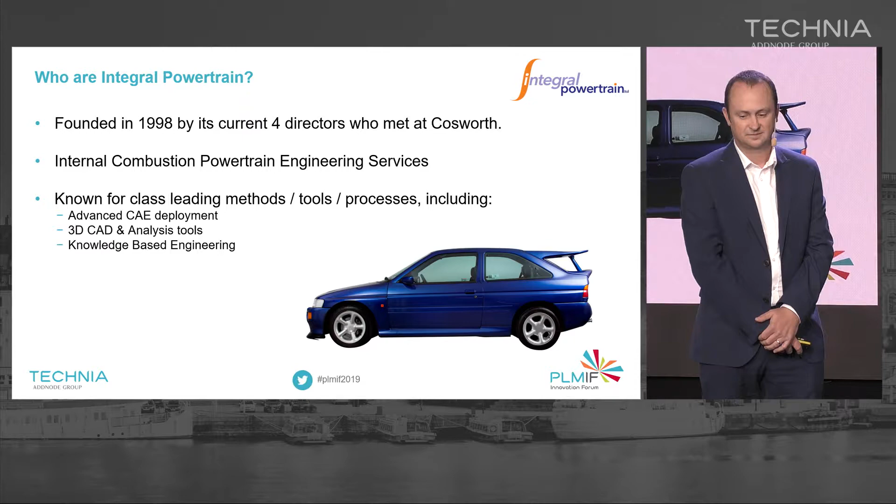So I'll hand over to Nigel to give you a bit of background. Okay, thank you. So the company was founded in 1998 by 4 directors who all met at Cosworth. Initially, the company was very much based around internal combustion powertrain engineering services. But even in the early days, it became quickly known for class-leading methods, tools, and processes around advanced computer-aided engineering, 3D CAD analysis, and so on.

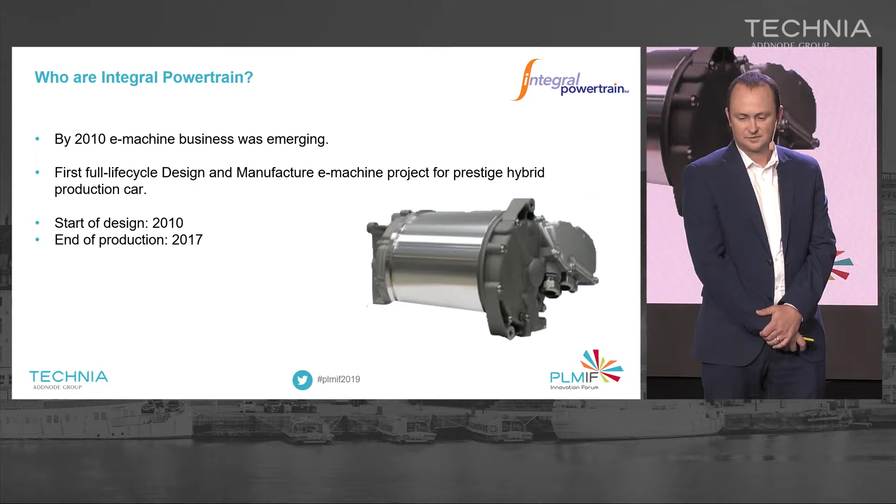But as time went on, by 2010, the e-machine or electric motors business was emerging, and really that was where they launched into their first full life cycle design and manufacture of an e-machine for a prestige hybrid production car, which ran through production until 2017. But today, that business has grown even more. It's a market that's rapidly progressing, and so now we're into the design and manufacture of very high power density e-machines and inverters for control of those. And so there's much growth in that high-end market.

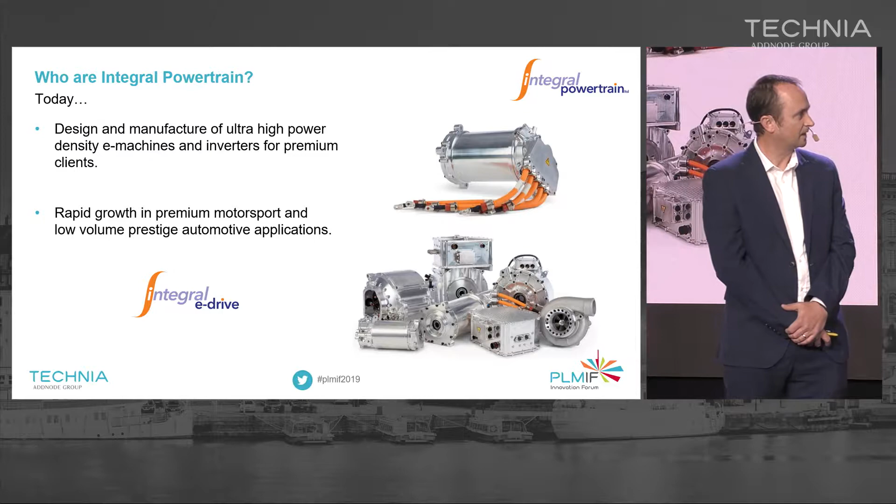So I think it's worth just pointing out that in the early days it was petrol engines and cylinder heads, cylinder blocks, crankshafts, and all the tools that went around that - there was a lot of work that went into making smart tools to allow you to design engines more efficiently. And there were some very premium customers who sought out that sort of knowledge-based engineering approach. But of course, in moving into this field, just from the outside, not many other people do this stuff. You can't just buy the test cell to test these things. If you're truly an innovator, you've got to not only develop the products, but the products to test the products. So that's the field they've gone into, and also things like the inverters, the electrical side of things. Again, you can't just buy these things off the shelf at the level these guys are operating. So it's a case of developing yet more capability.

Thank you. Yes, so I think we will play next a short video that explains a little bit more about our products and the company. We thought we could talk, but this says more in 3 minutes than we could.

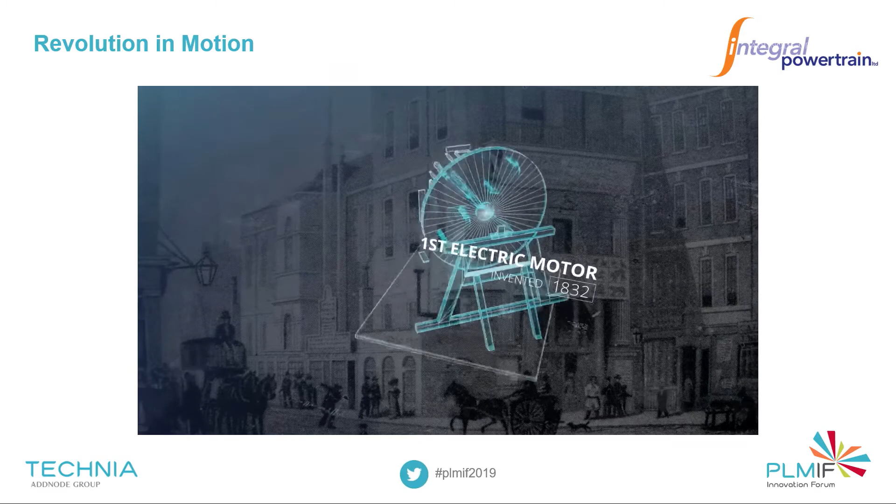The first electric motor capable of turning machinery was invented in 1832. Since then, large, heavy machines have operated power stations, trains, and industrial plants. But now, there is a revolution afoot.

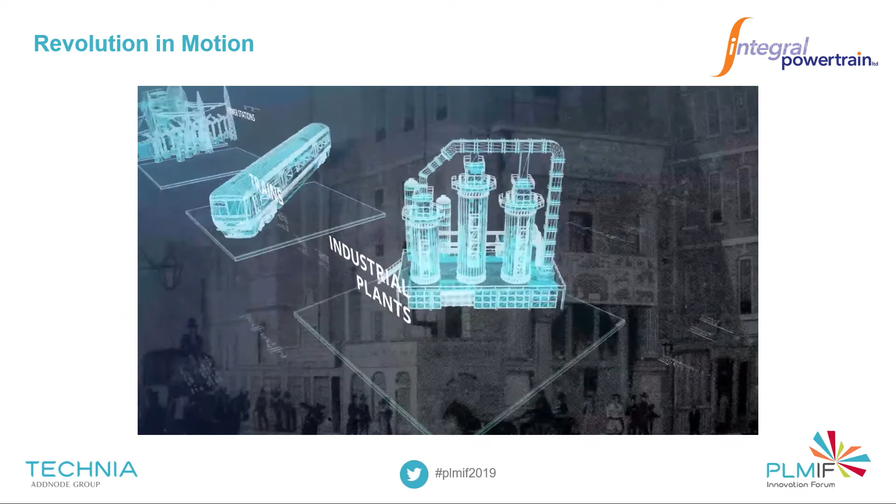The modern electric machine is driven by software and silicon switches, and uses immensely powerful, rare earth magnets. Over the last 10 years, these key enablers have themselves taken enormous strides forward, and now motors are riding the wave. Control algorithms operating at up to 100,000 cycles per second are driving machines with unparalleled efficiency, power density, and controllability.

Thanks to these rapidly evolving machines, the sustainable world of the future will benefit from dynamic, previously unattainable products. At Integral eDrive, we are at the heart of that future, pioneering technology that transforms. Led by engineers with the passion to excel, we have a track record of meeting the most demanding requirements, from aerospace to off-highway, from passenger cars to the highest echelons of motorsport.

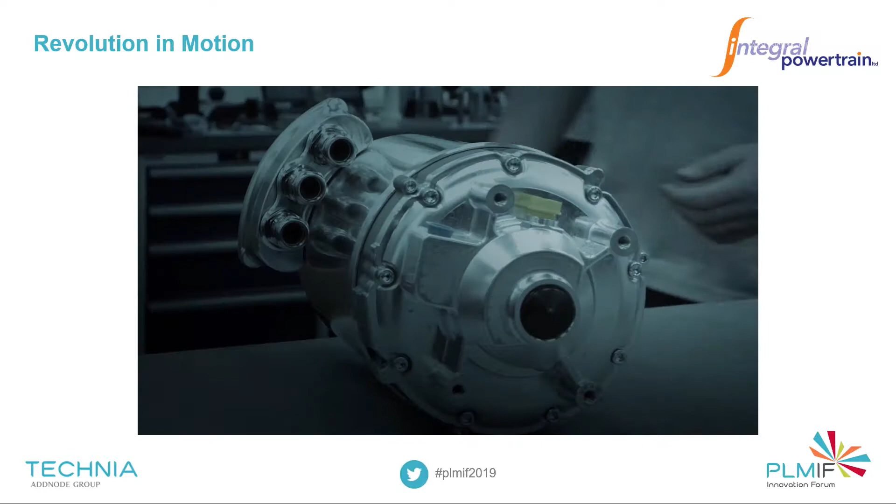Our goal is to give you the eDrive that makes your product excel. Through R&D, we continuously evaluate new technology and we strive to improve. Amazing things are possible with eDrives.

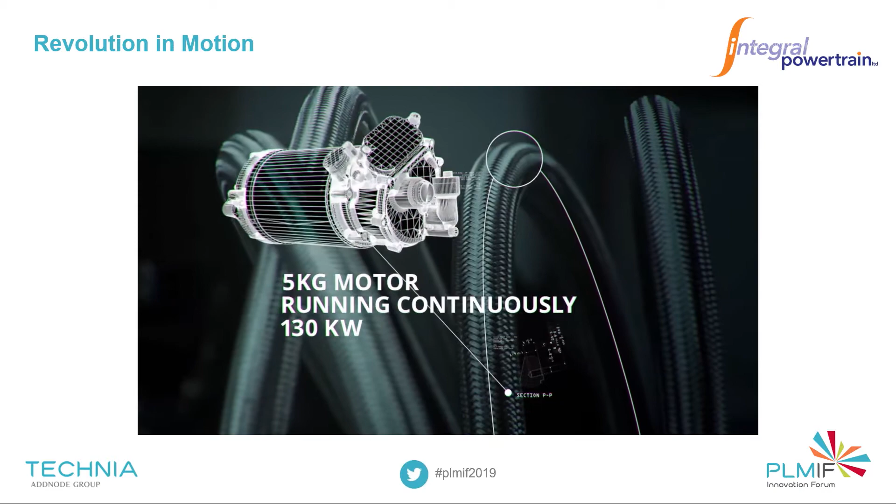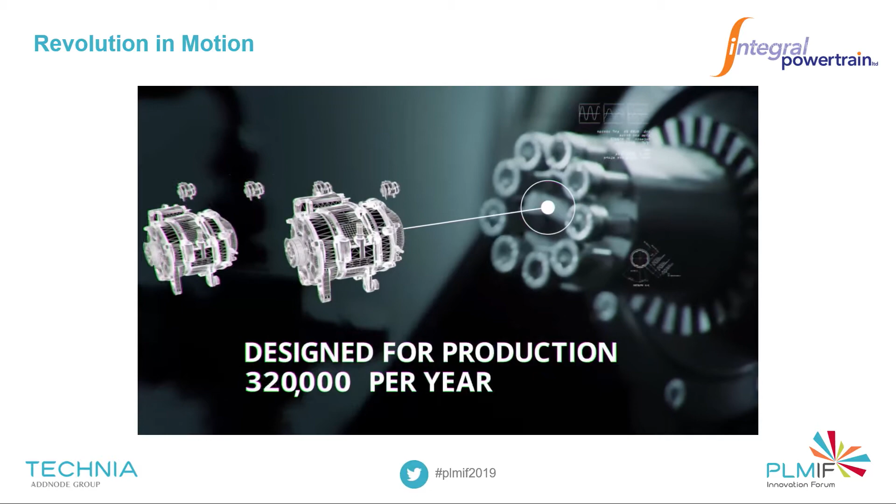Imagine a motor weighing 5 kilograms that can run continuously at 130 kilowatts, the same power as a typical family saloon car. Imagine a motor capable of rotating more than 2,000 times every second. Imagine a motor designed for production in excess of 320,000 pieces per year. Imagine a motor which can withstand 80 G of vibration and can even be submerged.

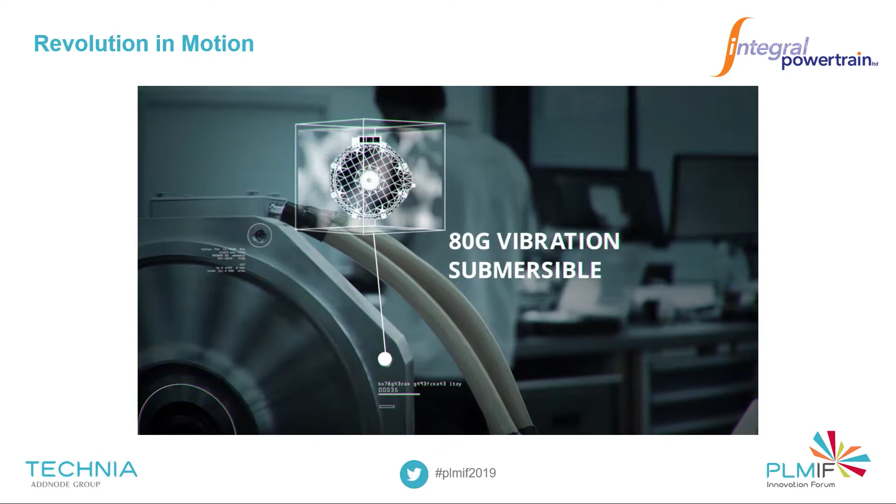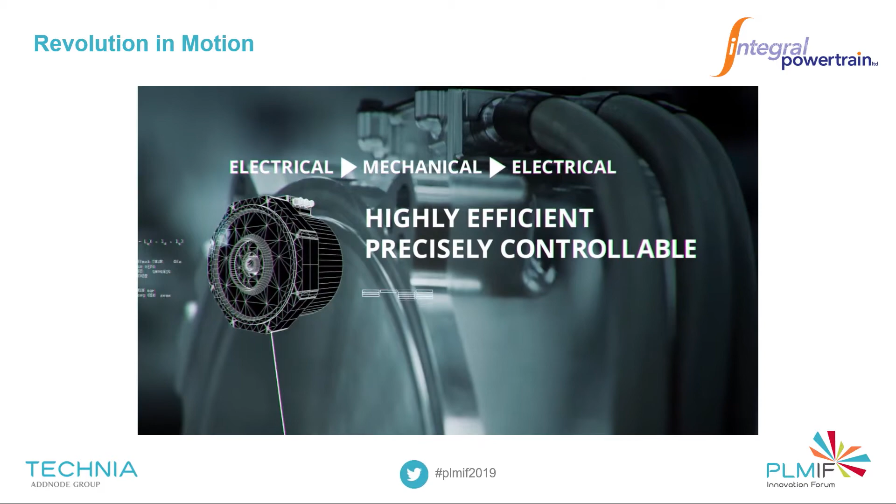Imagine an electric motor drive that can exchange electrical power for mechanical power with 98% efficiency in either direction, precisely controllable with the capability to react in less than a millisecond. This is not just fantasy. This is today's reality at Integral eDrive.

With more than a 20-year track record of powertrain engineering, our ability to engineer motors into demanding applications is second to none. All of our electric drive systems are designed, validated, and manufactured to offer the best possible match to our clients' objectives. Supporting our clients with bespoke application activities according to their needs, we ensure optimal performance, however challenging the requirements.

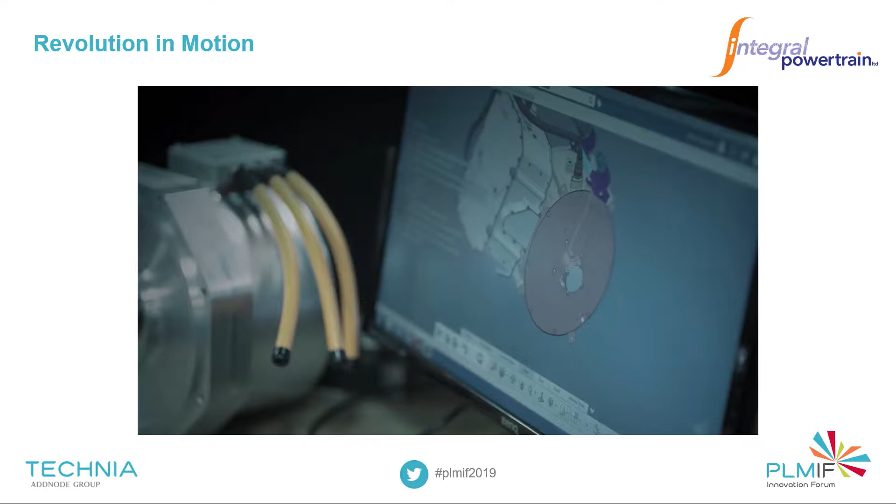As the future approaches, Integral eDrive continues to evolve and embrace new technology to meet tomorrow's requirements. There is a revolution happening in motion. Be part of it. Integral eDrive, engineering the future.

Or engineering the now. Indeed, yeah. So, not wanting to labour the point, but these things are pretty amazing.

So there's a quick comparison here of one of our eDrives versus a conventional IC passenger car engine. Similar power, quite radically different in terms of RPM, revs per minute. You can hold an eDrive in your hand. You'd probably struggle with that internal combustion engine. That particular one is no bigger than this, honestly. And it's the same power as your average family saloon.

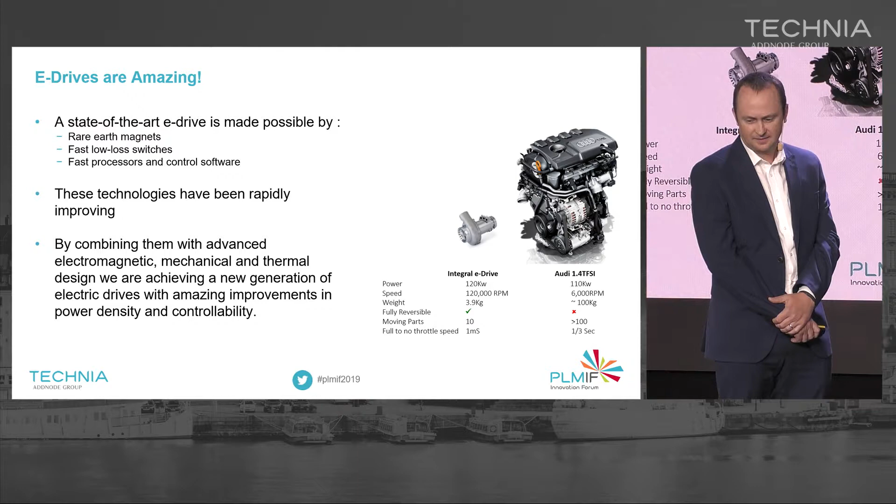And it can go from 0 to full power in 1 millisecond, and then reverse in the same type of speed. We've got another little video just to let you see what this means in action in a minute or two.

Just so you get a feel of what these things sound like. And there it is, holy shit. Oh my god.

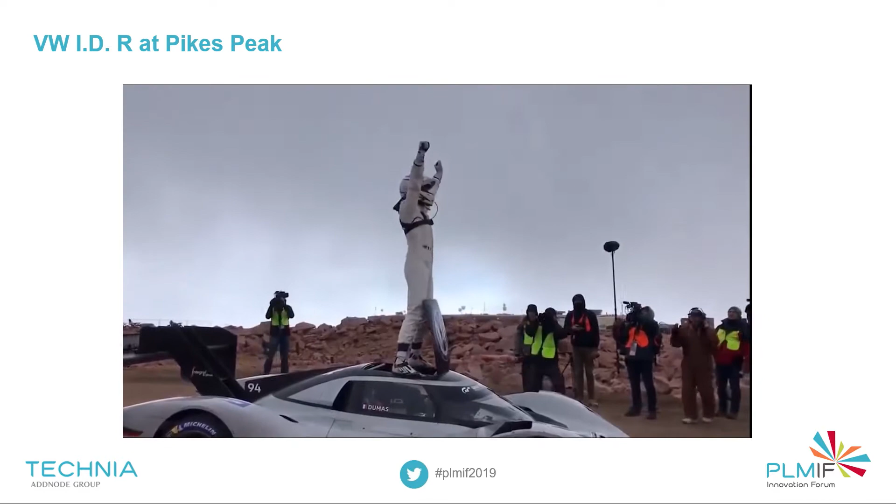Stay back, please. Yeah, just wait. Knock your fillings out, to knock your fillings out at that speed.

That's right. Yeah, so that car's taken the Pikes Peak record that previously stood for something like 13 years, I think. It's gone on to set electric records at Goodwood Hill Climb and Nürburgring. So quite an impressive bit of kit.

I think the comparison as well, sorry, if you listen to the previous record, which was the Peugeot, Sébastien Loeb's Peugeot, and you hear the traditional engine with the turbos and the wastegates, the noise, the comparison of the two is just, there is no comparison. That's almost silent. Most of the noise you could hear was the helicopter or the tyres, to be honest, and the spectators, sorry, there was a bit of language in there.

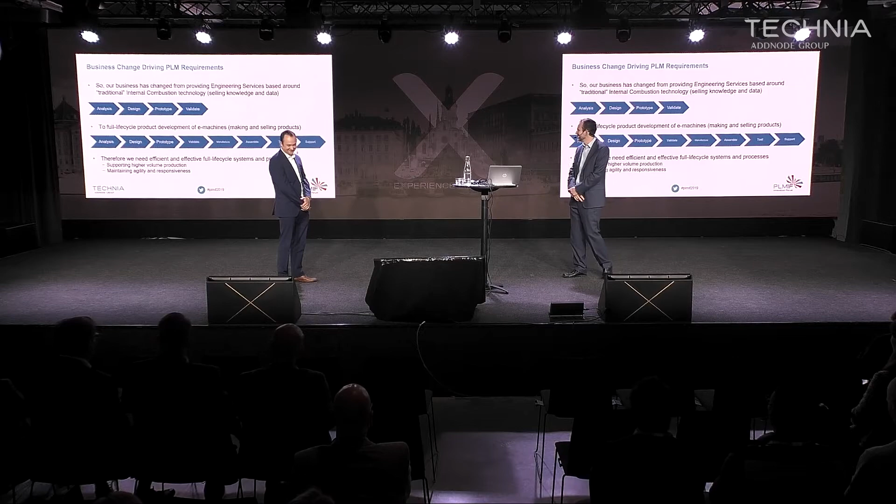I was just going to mention this one. No, this is your one, isn't it? I can do this one. Carry on.

So moving on to the PLM, our business is changing really. As I said earlier, we've grown from being an engineering services company, involved in analysis, design, prototyping, and validation, to now full life cycle. So that's driving the need for a fully featured PLM system now.

And also, as the business is growing, we're investing, we're building a new premises to co-locate. We've got challenges at the moment - we've got 4 sites separated by a few miles in Milton Keynes, but that threatens decent collaboration. So bringing people together, combined with better tools and processes, we think should set us up for the future.

Yeah, I think I described it to someone I was talking to earlier. From the outside, it looks like you've had several years of fun - a really dynamic young company growing. It's a bit like people growing up, and we're now in the difficult teenage years where you can see full maturity, and yet you've got to get from here to here. So the challenge is to keep the innovation and agility that the company has in its DNA as you grow, because there's all that competitive advantage you've got at the moment that could so easily be lost.

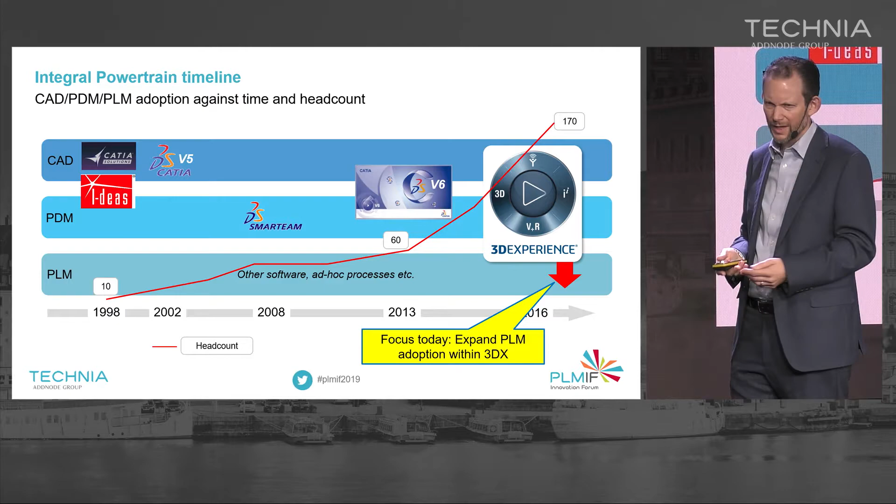So almost every department would benefit from accessing 3D data and the engineering information behind it. If we take a step back and think, what does that look like in practice? Well, a simple first step might be to get people in the build shop viewing live 3D data instead of exported 3D data.

And the same for bills of material and so forth in purchasing. So, baby steps - that is in use. That's just a picture with a few pieces taken out for security, but that is a motor in 3DX as viewed by a non-CAD user.

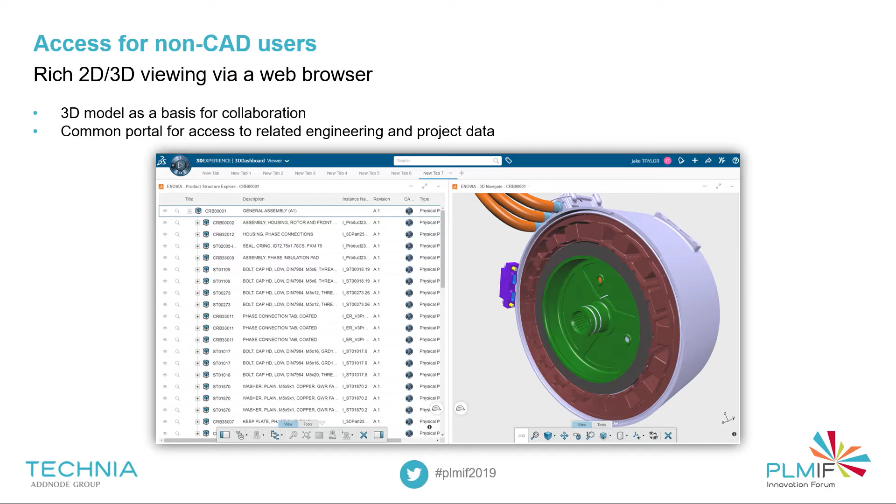So this takes us on to the foundation where we are as a starting point, because we're not at square one, are we? No, we are in a good place already, and that's for two reasons. Number one, because we bring, as TECHNIA, knowledge of Dassault's roadmap, and we have a very close relationship, so we've been able to say, you guys are working already with the CATIA data structure very heavily. That is the foundation for the future of this unified product structure approach.

So you tiptoed into EBOM, hadn't you, a little bit? Yeah, that's right, and that was purely for exporting to ERP. So we took the choice to step back out of there and get ourselves in position ready to capitalize on all of the new things coming from the 3D Experience platform.

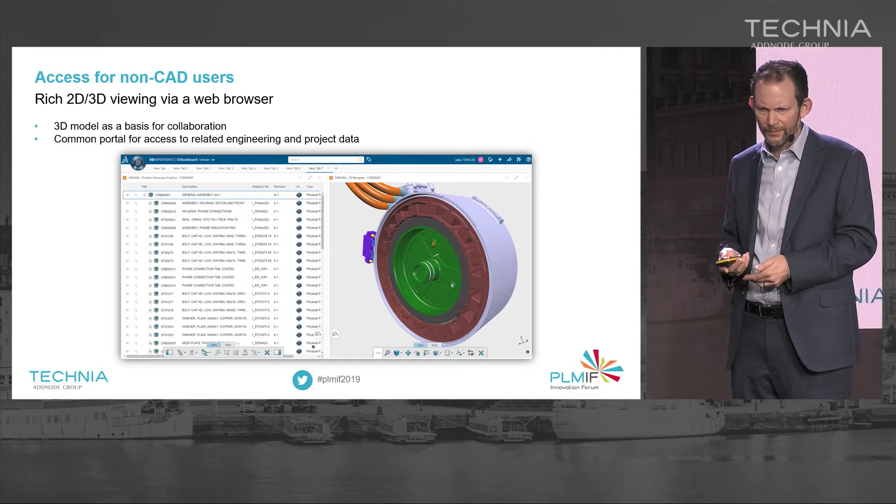So the unified product structure approach - this is taken from a Dassault slide, albeit adapted slightly - gives a picture of what we're planning to do. And of course, this then feeds back into the TECHNIA knowledge pool, if you like, for us to then help other customers who might be doing the same thing.

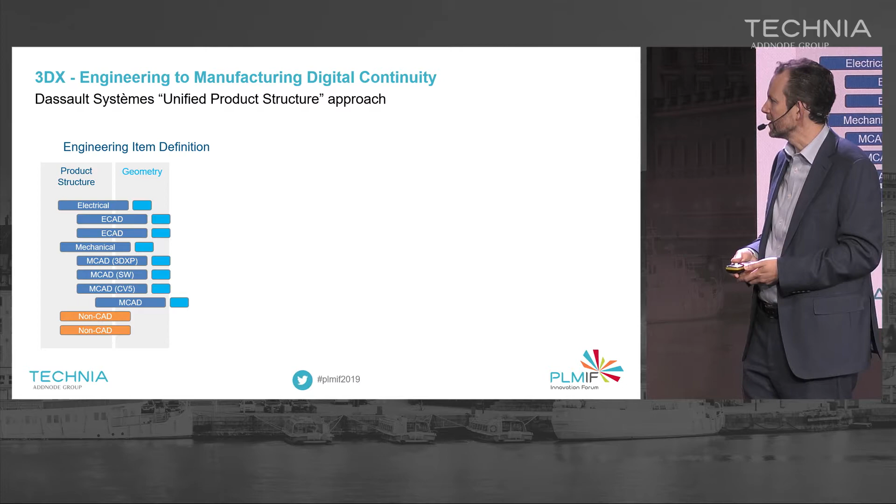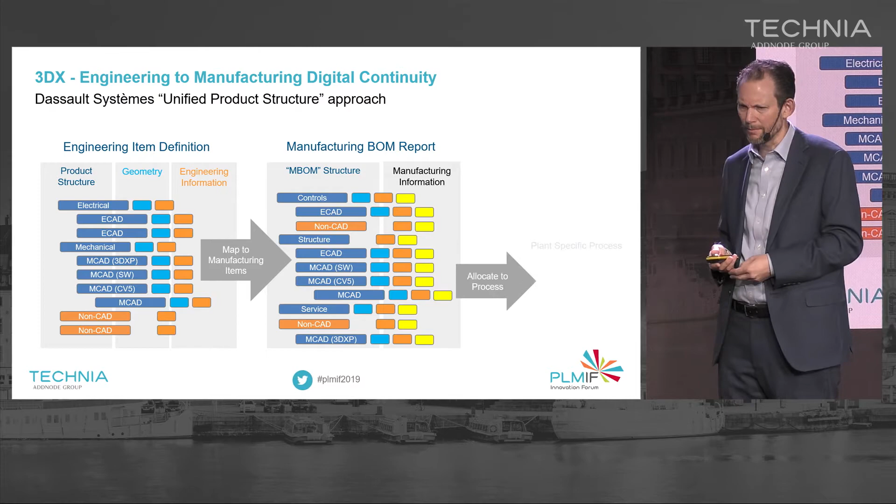So we have the 3D Experience VPM, physical product structure, which we apply geometry to, and then enrich with the engineering information. The intention then is to rearrange that and supplement it with additional product data, such that we have an M-BOM essentially. And in turn, the M-BOM can be cut and diced for individual plants. In other cases, you can export to other systems, whether it be MRP, ERP, or so forth.

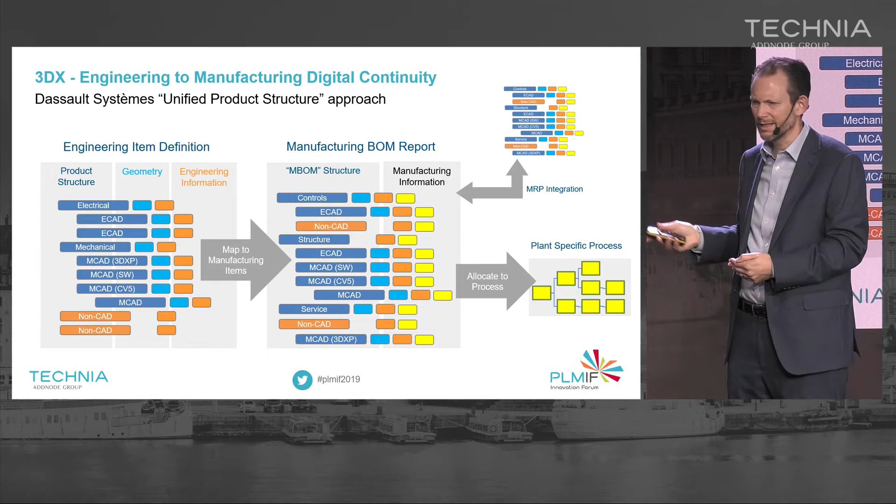Now, Integral Powertrain - and I don't think any customers of ours at the moment have gone this full journey yet, but some are very close - the position that Integral Powertrain are in at the minute is here. So that's not a bad place to be.

So the thing that's changed is the ERP export, to avoid using the classic EBOM approach. We worked together to put together an export function to allow them to go directly from the CAD structure, which now Dassault have done something that does the same. So, we can park that shortly, but that's allowed the company to move forwards.

And it's a very rich BOM structure as well. It's got all of the manufacturing stages for every component, so a shaft that might be a raw material that's turned and ground and so forth.

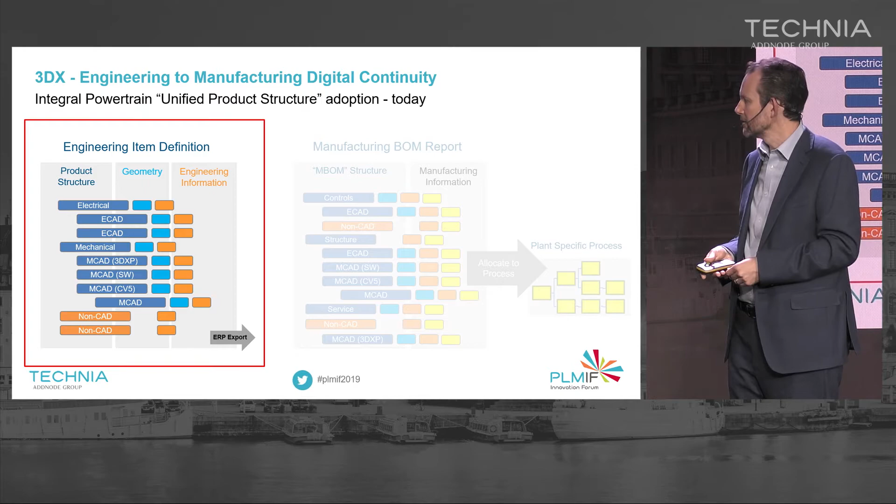Very comprehensive process already. So just to finish off on my part, the design side of things is quite well understood, but as far as adopting the platform for the accompanying business processes, that's - I wouldn't say low-hanging fruit, because we did try change management, and hearing some of the previous speakers, I wish we'd come a few years ago, really. Yes, because it's quite a comprehensive activity, even in a company of 170.

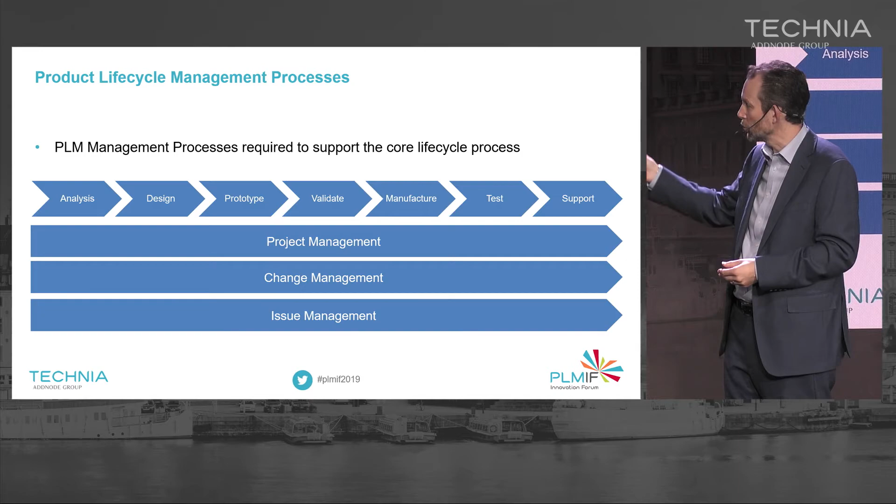But these are the things that are already in train at the moment, and we're just going to give you an overview of that and a little bit more on the roadmap. In essence, this is the overview. You've seen quite a lot here, and one of the reasons for being here is to learn more about the TECHNIA tools.

So yeah, I've been really enthused by the presentations I've seen over the last couple of days. There's customers talking very highly of the work they've managed to achieve with the TECHNIA products. That's a relief. And seeing the new functionality, the roadmap for the tools, has given me confidence as well.

So just to be clear, this isn't future, this is now. We have, in terms of the foundation for this, the platform is in and being used by, I think we've got 40-something using CATIA. There's some Simulia in there. We've got the 40-plus non-CAD users using the viewing tools and 3D dashboard mostly.

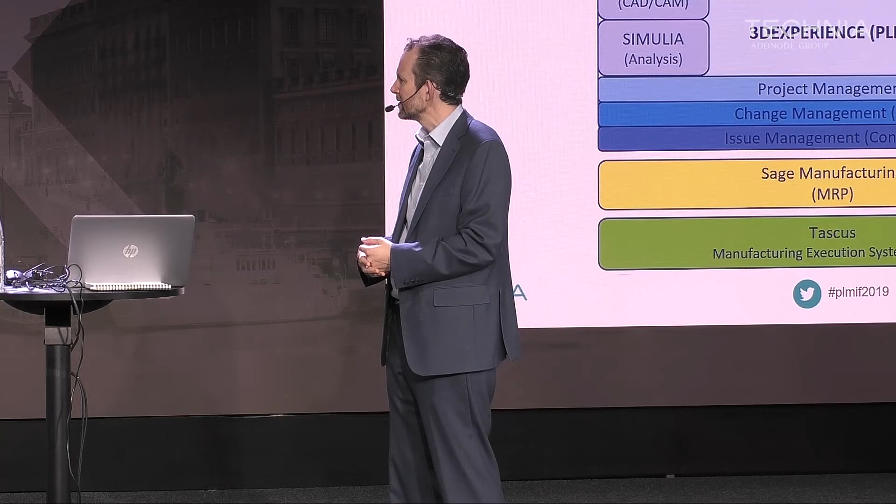Indeed. The integration framework is on the test system, and all of the existing batch processes are being moved over to the integration framework as a prerequisite to moving forwards. And based on the discussion we've had with some of the TECHNIA folks today, I think the TVC stuff's going to be rolled out very quickly. Yes, I think so. Okay, we'll move on.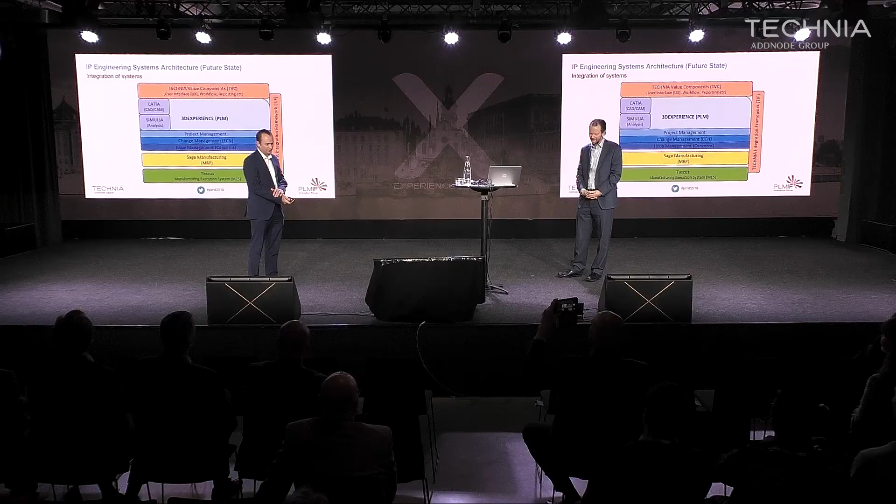So next few slides, I'm not going to talk through all the text here, but it's just going into a little bit more detail around those key management processes that I mentioned before. So for project management, I think the out-of-the-box Dassault product looks pretty good. It would give us a program-level view and quite a lot more functionality around project management and dashboarding than we have today. So we're quite keen to push on and get that deployed.

Well, just bringing the company together, especially with the new changes for the new site. Yeah, we've got a growing number of projects, bigger challenges, multiple projects calling on common resources.

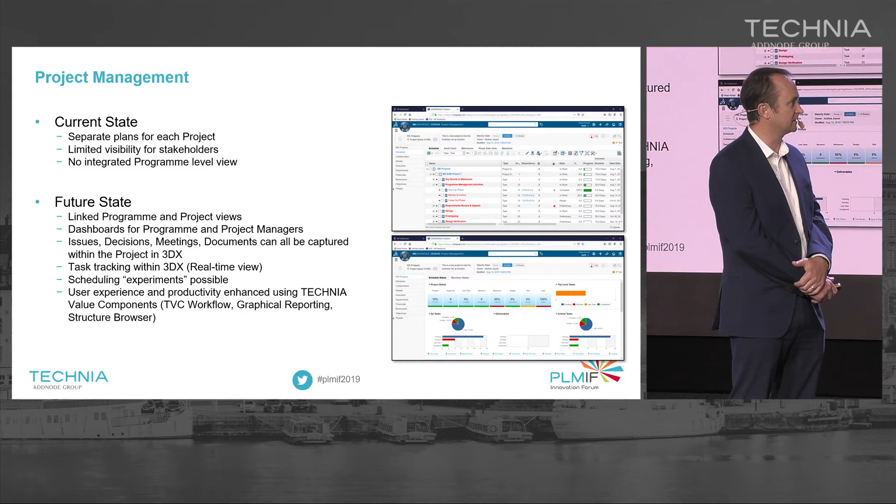Issue management is a similar story, really. They're trying to pull together various different disparate issue systems into one database.

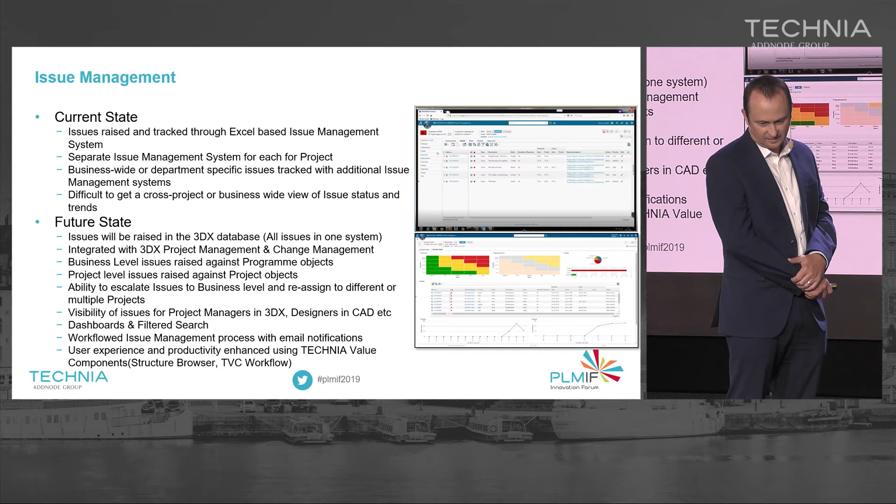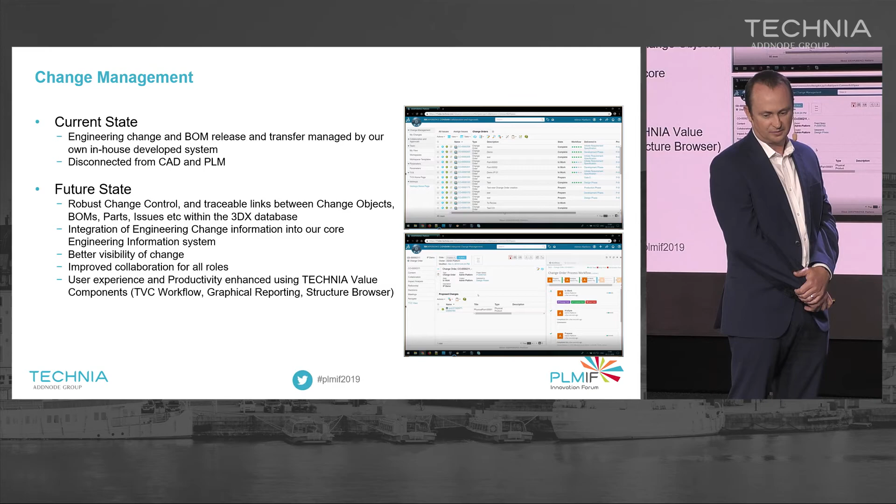And then change management, the longer term piece. We have our own in-house developed engineering change system today, but moving over to... yeah, it's an interesting story there. We've worked together on a proof of concept, which is using the TVC workflow again. So it's on the development system, and there's stuff underway. So it's not as if we're at the starting point, as I say. We're already moving.

But I think again, smaller companies invest almost invisible time and effort in making systems from tools they're familiar with. So Excel's a classic, or whatever. I don't know if you wanted to say the numbers, but it was a significant amount booked to the engineering change process in what looked like almost free company tools. So yeah, engineering time and development time.

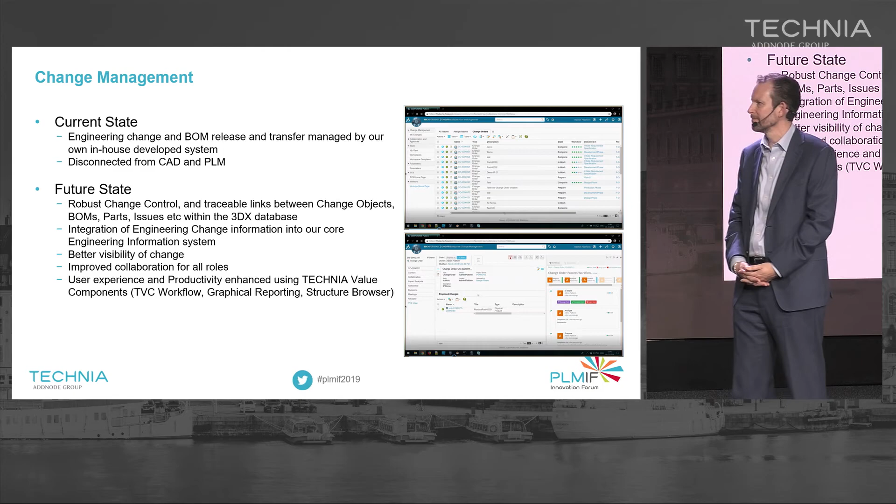You're, in essence, pulling skilled people away from their day jobs to develop systems, which really we want to move away from. And it's easy if you're in a big company to take for granted these sort of systems, but smaller companies have to really fight for every penny to justify this sort of thing. And the more value you can get out of these systems, the better.

And that's very much the intention of this project we're doing, is to understand from a friendly - all customers are friendly, of course - but known customer, their drivers, and be able to replay that in other customer cases.

So, as the slide says here, we want to use TVC to enhance the user experience and the productivity around all of those processes. And as I said before, I think it looks like we should be able to make some great strides using the tools from what I've seen this last couple of days, and TIF, both for batch job management and integration of systems.

I did have high hopes that when you came here you would see the likes of Stefan and Anders doing the TVC stuff coming out of their fingers, but what I didn't expect was to see TIF coming out of somebody's fingers today. So I think you've been spoiled a little bit. Yeah, indeed.

Okay, so in conclusion then, it's quite simply our objective is to get that one version of the truth that PLM can provide, extract more value from our existing 3D experience platform with the TECHNIA tools, and hopefully come back and report on some great success next year.